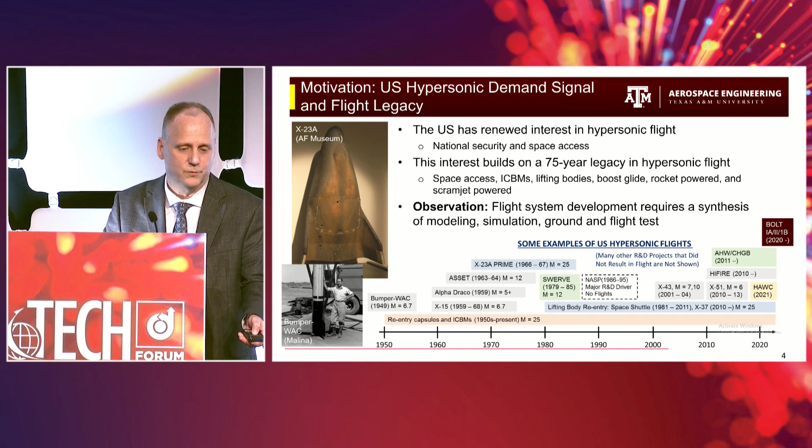And an observation, maybe it's a hypothesis, is that these flight system development efforts required a synthesis of modeling, simulation, ground, and flight tests to be successful. And I've listed the BOLT flight test program at the top right there.

Thermal management is another key challenge associated with hypersonic flight, and I chose the X-15 primarily as an example for two reasons. One, Hugh Dryden was instrumental in the X-15 program existing. And secondly, we did some experiments at A&M where we tried to reproduce in our wind tunnel the thermal loading that resulted in the loss of that scramjet engine test article just below the X-15. We were able to successfully reproduce that experiment.

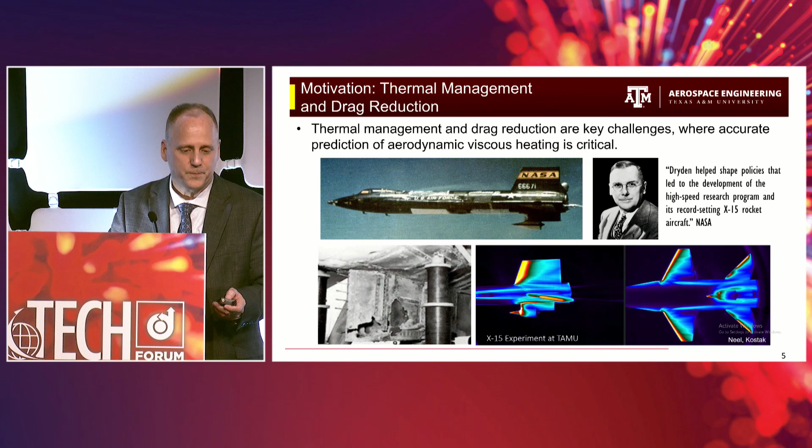Moving on, my last motivation slide is really based on Air Force interest in hypersonic viscous flow. The Air Force Research Laboratory has engaged in a number of flight tests, starting with the HIFiRE-1 geometry, which is a 7-degree cone, bottom left there, HF1. That produced a two-dimensional flow field with two-dimensional boundary layer instabilities.

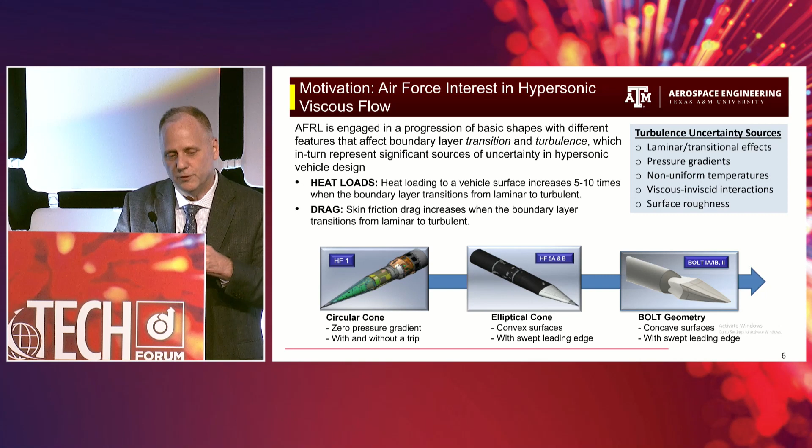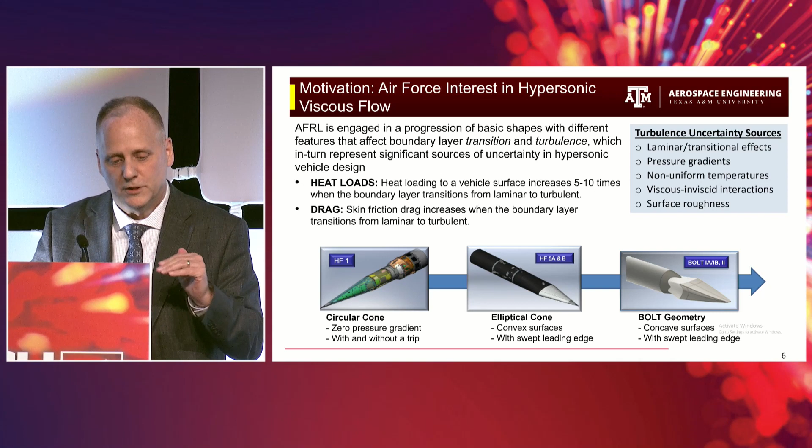Moving to the right, the second geometry was a 2-to-1 elliptic cone, which produced a convex surface with three-dimensional instabilities and three-dimensional boundary layers that led to cross-flow breakdown to turbulence. Then finally, the BOLT geometry, shown there, which is a concave surface with highly swept leading edges, which has some of the same features as the elliptic cone in terms of flow structure, but is more dynamically rich in terms of the number of secondary flow structures set up by the shock structure. We'll talk more about that as we move on.

But heating is really important for hypersonic flight. As we transition from laminar to turbulent flows, we can see anywhere from 5 to 10 times the heating level, and the skin friction follows suit via the Reynolds analogy.

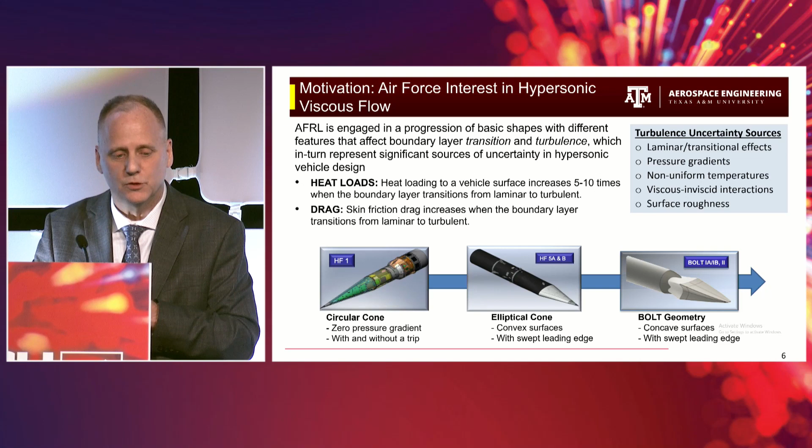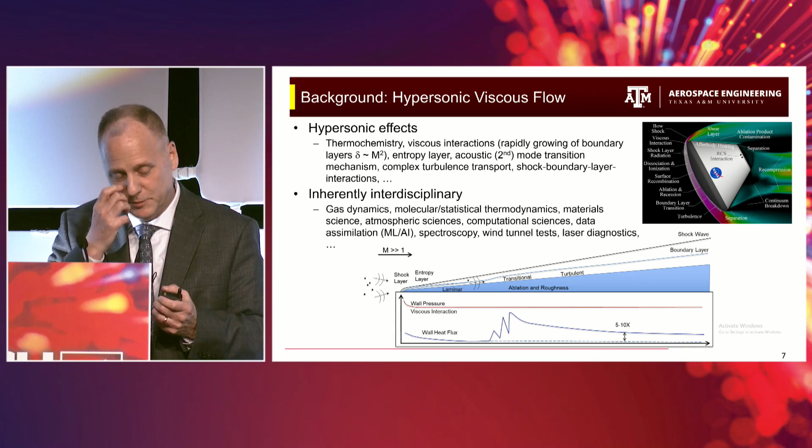Just a little bit of background on hypersonic boundary layer viscous flows. This may seem a little sophomoric, but I just wanted to take a minute and walk us through some of the processes because this will set the stage for the flight test experiment.

I'm usually wanting to use the laser pointer, but you can't see that. Starting from the leading edge of this hypothetical vehicle along the bottom, you have a shock layer, and we'll go through each of these in more detail. You have a shock layer and a highly curved shock wave, which produces an entropy layer, basically a change in entropy as the shock is turning around and following the body.

That entropy layer leads to vorticity, which can impact the growth of the boundary layers and impact the receptivity in the boundary layers. Eventually the boundary layer will reach a high enough Reynolds number and the disturbances will be such that the boundary layer will transition to turbulence, and when that happens, you get an increase in heat transfer.

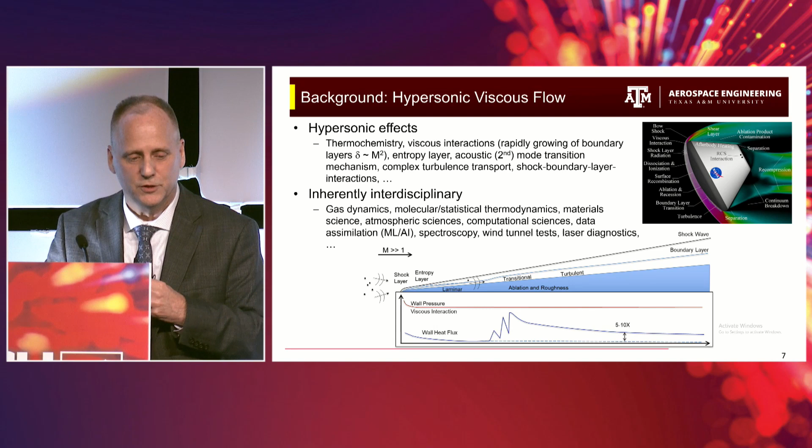Because hypersonic flows involve high temperatures, thermochemistry, radiation, gas dissociation, it's very multidisciplinary. But that's what makes this problem very exciting—it involves a lot of disciplines and you have to work these problems simultaneously, or work together, to make progress. So I'm going to walk through some of these regions really quickly.

And all of that's feeding into the boundary layer to influence transition, turbulence, erosion, ablation. All of those factors are happening in these flows.

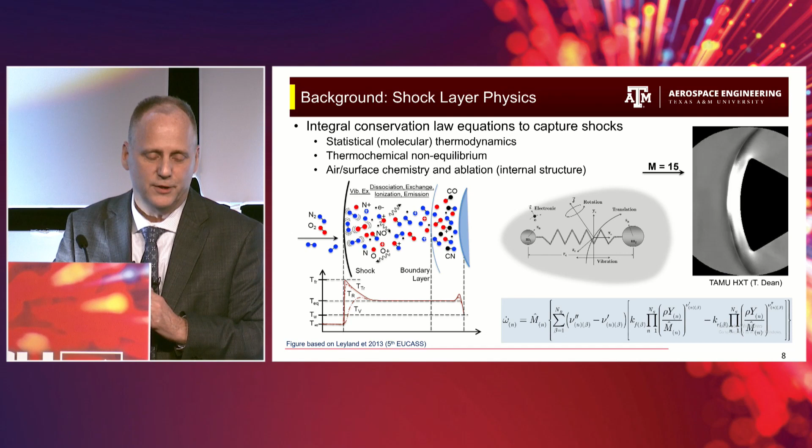So let's move to the next slide. A little further downstream, we have the laminar boundary layer growth, and these hypersonic flow fields create highly curved shock waves, and these boundary layers will experience pressure gradients due to these shock waves because the boundary layers themselves will grow very rapidly. That creates a displacement which changes the shock shape, which then ultimately changes the boundary layer. So it's a very coupled problem.

It's a solved problem, though. This is not something we have—this is a laminar problem. We can solve this problem. So we've solved this problem for the Bolt 2 geometry.

I'm going to take this slide to introduce the Bolt 2 geometry in a little bit more detail. We're looking at the flow going up the geometry, with the nose at the bottom. You can see all of these vortex streaks on that boundary—that's the laminar basic state.

So this is a very complicated laminar flow. Each of these structures provides a different potential mechanism to lead to transition from laminar to turbulent flow, as well as complex early turbulence. Trying to understand and decouple all of this is the purpose of the Bolt 2 flight experiment.

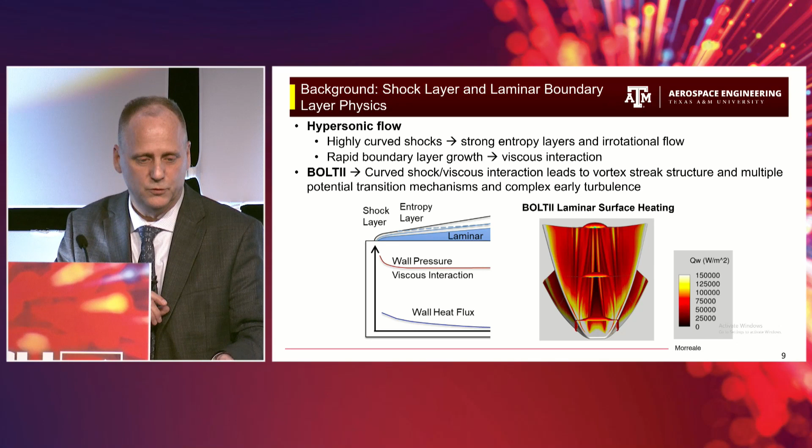The boundary layer will take some of these disturbances and amplify them. Some will be damped—it depends on the structure of the boundary layer: the velocity gradient, the temperature gradient, the pressure gradients. All of these things can have an influence on the boundary layer transition process.

But once the receptivity process happens and these disturbances make it into the boundary layer, you start to see growth of some of these—you have modal growth. That's along path A, and typically we're talking about first mode, which is Tollmien-Schlichting. Second mode would be an acoustic mode, which only occurs at high Mach number.

You have crossflow and Görtler. Crossflow is a three-dimensional boundary layer instability. Görtler is due to concave curvature. And there are other modes that maybe we haven't identified yet.

Then there are other mechanisms listed: transient growth, and bypass to the far right. The secondary mechanisms result due to the distortion of the boundary layer from the primary mode mechanisms. Prediction of transition for these types of problems really hinges on identifying the mechanisms and when they're going to transition.

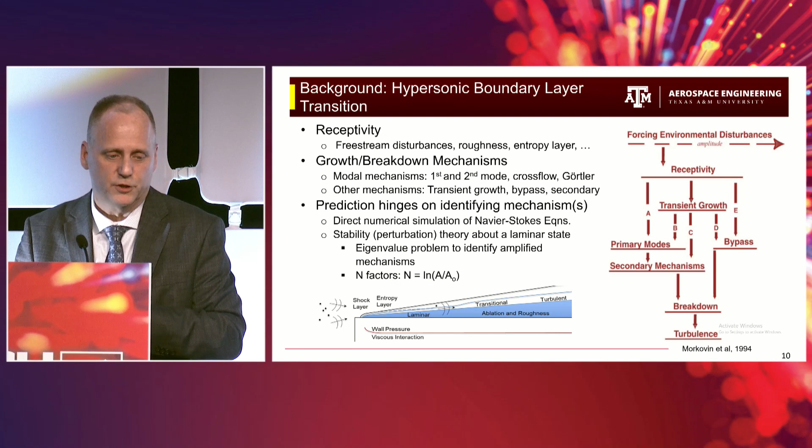So the tools we have under our belt to study this are direct numerical simulation of the Navier-Stokes equations, or we can use stability theory. Stability theory ultimately works its way into an eigenvalue problem. We look at the growth rates, and at a certain growth rate we determine transition may happen at this particular N factor.

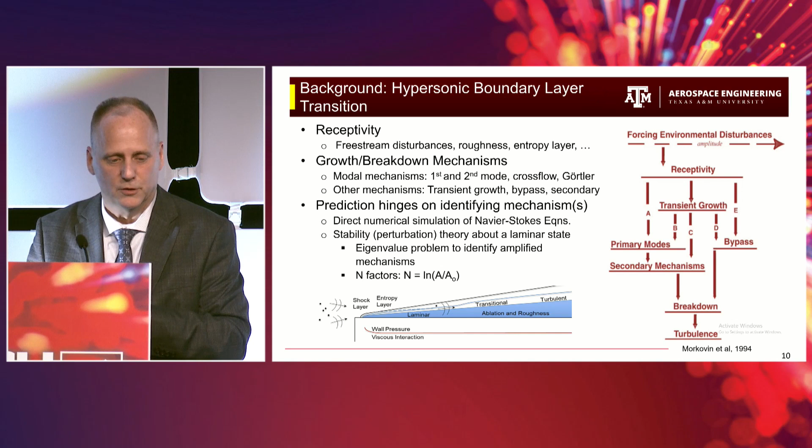The N factor is a measure of the amplitude at the location you're at, normalized by the initial amplitude. These scale exponentially, so we typically talk about these on a log scale. Let me just go to the next slide.

So this is what second mode looks like—these are some measurements from Farhan Siddiqui and Bill Saric and myself in the Mach 6 quiet tunnel at Texas A&M. You can see that rope-like structure in the boundary layer.

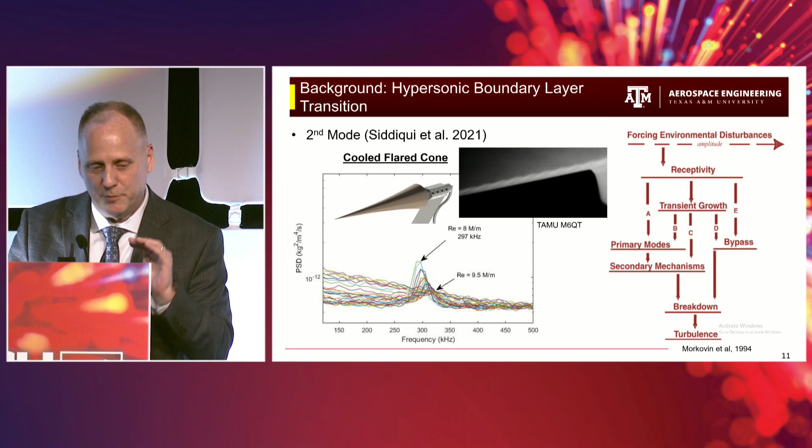That's the second mode instability, and you can see its growth rate. You can see the peak around 300 kilohertz, and then you can see it break down to turbulence around 9.5 million per meter in terms of Reynolds number. Keep that picture in your mind because it's going to be important when we talk about the Bolt 2 flight test. The other mechanism that's important for the Bolt 2 flight test is crossflow.

These are some measurements from Ian Neel, also in the Texas A&M Mach 6 quiet tunnel. You can see a couple of things here: on the figure on the left, which shows the color contour of the streak structure, upstream of those red regions are vortices, called stationary crossflow instability vortices.

These result from the fact that you have flow wrapping up around the 2-to-1 elliptic cone and forming a sort of mushroom region in the center. This gives you a span-wise velocity gradient that results in these instabilities, which lead to transition. That jagged front you see there is characteristic of crossflow instability.

Below that is a numerical simulation from Helen Reed's group by Alex Moyes, showing one of those crossflow vortices. You can see that distorted boundary layer.

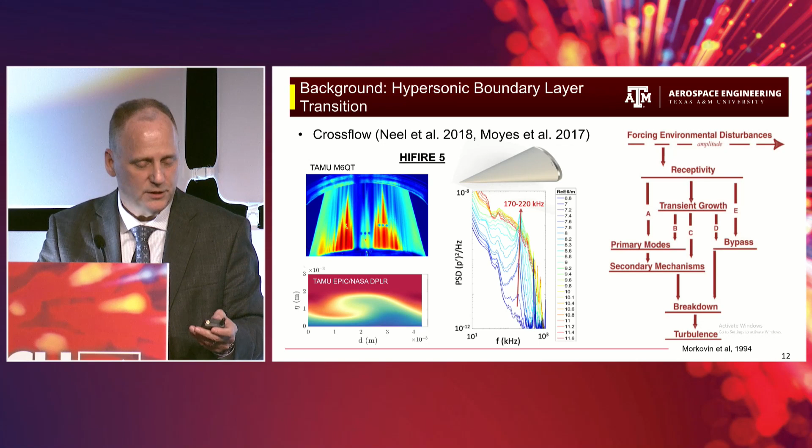That results in a number of additional instabilities, and these instabilities are the secondary mechanisms that can also lead to boundary layer transition. The power spectra shown in the middle, Ian measured with one of the PCB transducers. He was able to pick up that secondary instability which led to breakdown to turbulence in those red streaks on this geometry, another building block towards the Bolt 2 geometry.

On the Bolt 2 geometry, we have this complex laminar basic state with all of these vortex flow structures. The question then becomes, which of these structures leads to transition, and how long does that transition persist into the turbulent flow field? There's been a lot of work in preparation for this flight test.

I'm showing some simulations. The laminar basic state was run by Brian Morreale at Texas A&M, and there's also some numerical simulations run for the Bolt 1 geometry, which is the same geometry as Bolt 2, out of the University of Minnesota. You can see second mode identified in these DNS simulations. You can also see a vortical mode, mixed modes, and traveling cross flow, so all of these modes we talked about earlier are present on this geometry.

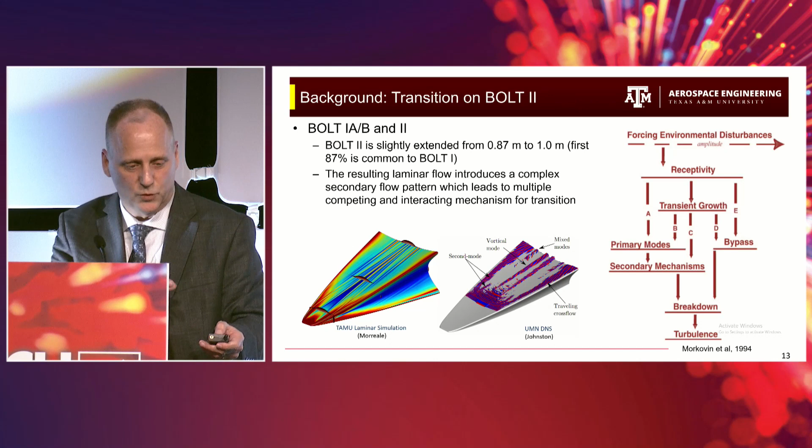So when you see second mode, you can think about that rope structure I showed you. When you see stationary cross flow, you can think about the 2-to-1 elliptic cone. The question is, which of these things leads to transition? So that's the transition part.

Now we're going to move to the turbulent part of the flow field. Turbulence has a number of different characteristics, but the one I'm going to focus on here is that it's characterized by a wide range of scales, and this range depends on Reynolds number. The higher the Reynolds number, the larger the range of scales, both temporally and spatially, so that makes numerical simulation a challenge.

However, direct numerical simulation techniques do exist, and they are informing the community on the dynamics of turbulent flows. But they are limited to relatively modest Reynolds numbers, and when you bring in hypersonic effects such as chemistry and thermal non-equilibrium, you introduce additional equations into the equation set at extensive computational cost, so it becomes even more challenging to do direct numerical simulations.

Large eddy simulations exist. They provide an opportunity to simulate the largest scales and model the smaller scales, so you can bring a little bit of the physics into the problem. Those are computationally feasible for some shapes, while modeled LES—there's a table at the bottom there from Choi and Moin, which lists the Reynolds numbers. Practical Reynolds numbers are 10 to the 7, 10 to the 8.

For DNS, we're talking 10 to the 15, 10 to the 18 mesh grid points in your mesh. Wall resolved LES, 10 to 9, 10 to 11, that's doable. Wall modeled LES, 10 to the 8, 10 to 9, that's definitely doable. The DNS ones are a bit more of a challenge for us, but we're making progress. Then Reynolds averaged Navier-Stokes is where we average out all of the fluctuations. These are the least accurate, but at least relevant for the hypersonic design cycle.

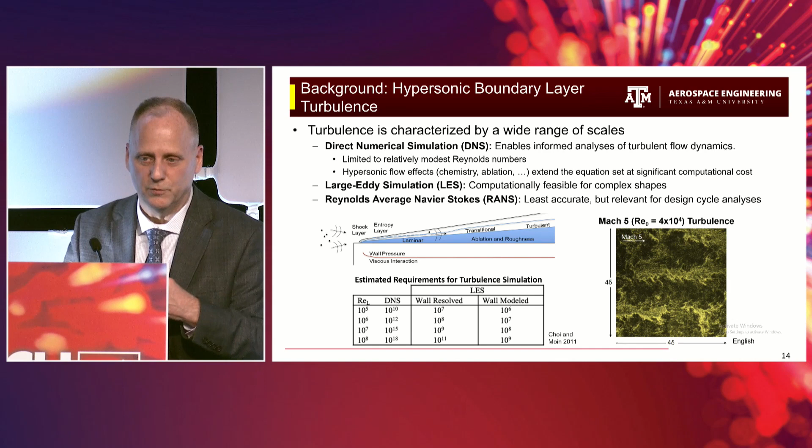I have a figure here, which is a PIV image from our laboratory from Ben English. Some of you that work with Sandia may know Ben English. This is a top-down view of a hypersonic turbulent boundary layer, very high Reynolds number Mach 5 boundary layer, and you can see the scale and structure we're talking about in these flow fields. This is a beautiful image, and it's a challenge to resolve all of these physics.

In terms of analysis for these flows, this is a little bit different than what we would do for the transitional problem, where we're trying to find the mechanism and identify where that breaks down. Here we're going to modify the conservation law equations. We're going to solve them directly for all of the turbulence, or we're going to modify them by doing a decomposition, a Favre or Reynolds average decomposition.

You can think of that instantaneous velocity at the top there, U sub i, as equal to either the resolved plus the unresolved part, or the mean plus the fluctuating part. You substitute all of that back into the conservation law equations, and what happens is you introduce the closure problem for turbulence, shown here. These moments in the boxed expressions are new unknowns that we have to either resolve or model, and that becomes the challenge. This problem has been around for about 120 years, so it's not a new problem, and there's some job security in working in turbulence, I think.

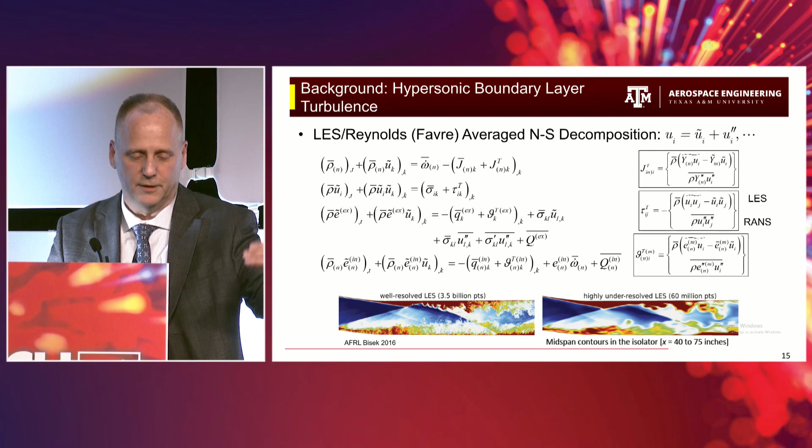There's some great images by Nick Bisek from AFRL, where he studied the effect of poorly resolving turbulent flows. He has a well-resolved LES simulation with about 3.5 billion points, and then he systematically reduces the number of grid points. Around 60 million points, he stopped, because you start to see significant differences and errors that can be traced to the subgrid modeling. So there's a lot of work to be done in turbulent flows.

In terms of industry standard, I've been to a number of talks today, and almost everyone runs the Spalart-Allmaras model, the K-omega model, or Menter's SST models. All of these models have one thing in common: they're basically computing an eddy viscosity, mu-T, in the expression for the turbulent Reynolds shear stress. They have advantages - a strong low-speed basis, and they're relatively simple to implement into a CFD code, since you just have a subroutine that computes the eddy viscosity, add that to the viscosity, and now you have a turbulent flow solver.

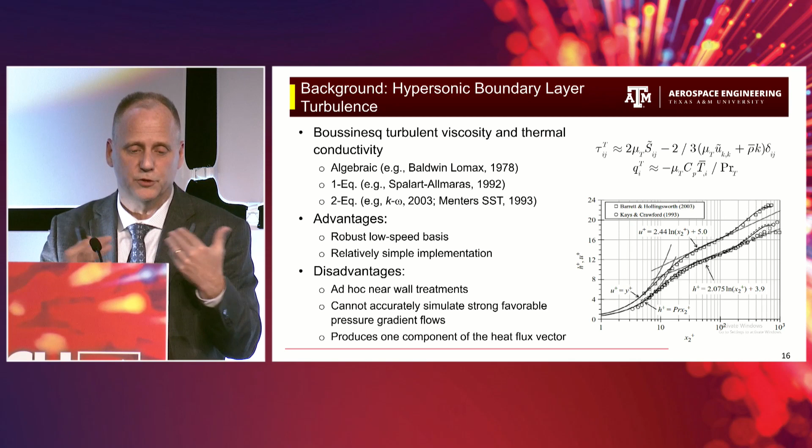There are some challenges though for high-speed flows, and I'll talk about a couple of them. Number one, the near-wall treatment, even at low-speed flows, is ad hoc and empirical. That's a challenge, resulting in inaccuracies, especially at high speeds, high Reynolds numbers, with cold walls. And they can't capture strong favorable pressure gradients, where we've observed that the Reynolds shear stress changes sign. That's a challenge.

So people have done different things - RANS beyond Boussinesq, going to second-order transport equations. I won't put a quiz at the end on the equations, but I will talk about them. These are derived by taking moments of the Navier-Stokes equation, allowing us to derive an evolution equation for the Reynolds shear stress, the energy flux, and all the different things we need to model hypersonic flows. The problem is it introduces new unknowns, so we have to draw models somewhere.

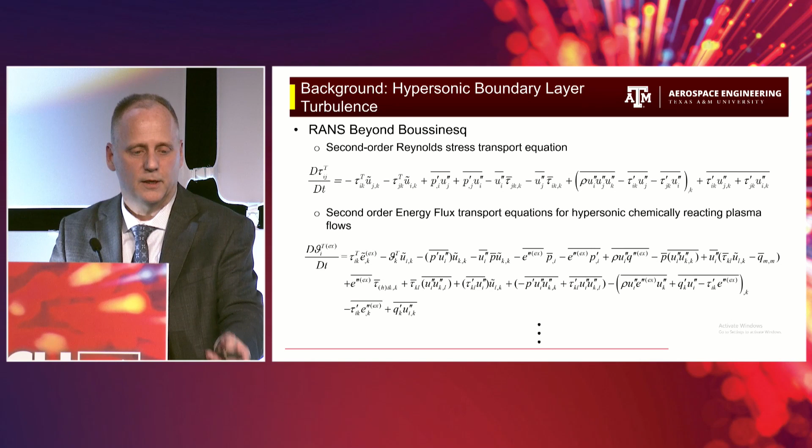So the question is, is it worth our while to do this? I have one set of data here, and the answer is, of course, yes - or I wouldn't be talking about it. Of course we want to do this. This is just an example why.

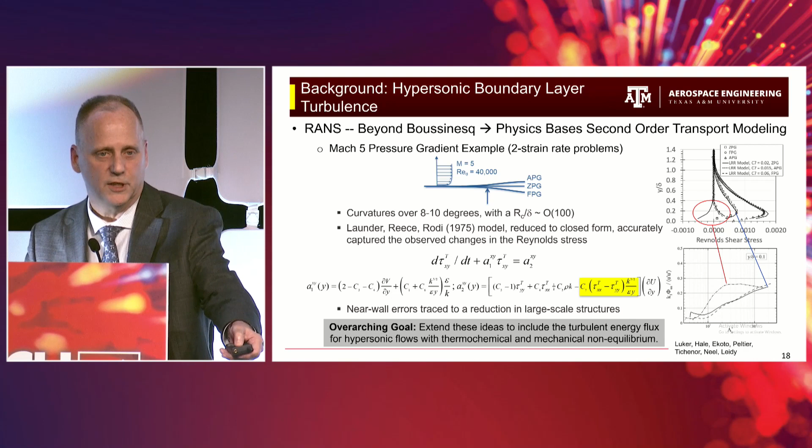That doesn't make it a model, that's still a curve fit, but the point of this whole slide is to demonstrate that moving beyond Boussinesq will pay dividends. And so that's the importance of this slide. And this leads, and the goal for us is to extend these ideas to all of the moments that we need for hypersonic flows. So that leads to our laboratory.

So we've developed a laboratory specifically to study these kinds of flow fields. And I'll just talk briefly about this.

This laboratory houses 3 relatively large scale, I think important hypersonic wind tunnels: the Mach 6 quiet tunnel, which came to us from NASA Langley. And that came to us because we hired Bill Saric and Helen Reed in 2005, so that was a gift from NASA Langley because we brought 2 of the leading experts in boundary layer transition to Texas A&M.

The actively controlled expansion tunnel is a conventional tunnel that we designed and built in-house at Texas A&M. That's a workhorse facility. Those 2 facilities share infrastructure, and since they've been operational, since around 2010, we've run them about 5,600 times. And what we do is we increment the stream tube length for each run, and if you add them up over that 5,600 times, we've gone around the world 3.5 times at Mach 6 in these tunnels. So that's pretty impressive. We've generated a lot of data out of these facilities.

The newest facility is the hypervelocity expansion tunnel, which is our high enthalpy facility. You've already seen a result from that - that was the Orion capsule. And this facility is a large-scale facility, has a 3-foot exit diameter, and we can do flight matched up to about Mach 15 or 5 kilometers per second. We can go faster than that, but that's flight matched with clean aerothermal chemistry. We can go higher than that, but we'll lose some of the aerothermal chemistry. We'll start to create issues in the flow field. Or we can go the other way, and we can run this at low temperatures and get exceedingly high Reynolds numbers. We can get over 100 million per meter Reynolds number in this same facility.

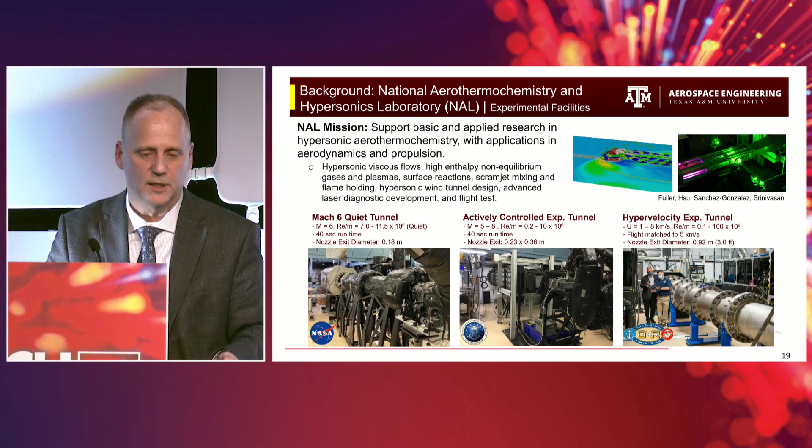So those are the 3 major facilities within what we call the NAL. Our diagnostics - the NAL sits right next to what we call the Aerospace Laboratory for Lasers, Electromagnetics, and Optics, which is run by Dick Miles. It shares a wall, and all of the facilities now are surrounded by lasers from Dick's group. And I would say 1 in 5 experiments that we do, we're validating a laser diagnostic technique for the ALLEMO. And so we're really excited about that.

In terms of computations, we're moving into doing direct numerical simulations in our laboratory. That's a heavier lift than we thought, but we're working our way through it. And we do a lot of reduced order modeling, as you've seen on the previous slides.

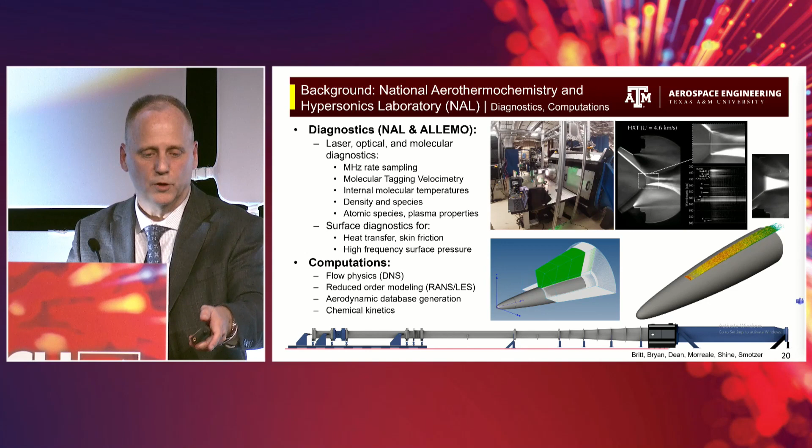This is spatially and temporally resolved optical emission spectroscopy. This was set up by Chris Limbach over a weekend. And so that's just a fantastic experiment that Tyler Dean is working on. And then, of course, Brian Morreale has been doing the DNS calculations for what we call the ONR ogive. This is the blunt ONR ogive. And we're running these experiments also in HXT at very, very high Reynolds number.

You're looking at me like I need to go faster. I'm doing okay on time.

Fine. All right, so that brings us now to the Bolt 2 flight test, which is the boundary layer transition flight test in memory of Mike Holden. Mike was a co-PI on the project with Aaron Dufrene. So this project was out of A&M and with CUBRC.

I was a PI, Helen Reed and Ed White were co-PIs from Texas A&M. Aaron Dufrene, Tim Wadhams, and Mike Holden were the PIs from CUBRC.

We lost Mike in the first year of this program. That's a photograph of Mike with Bolt 1. And this plaque, written by his colleagues and family, was mounted to the Bolt 2 geometry for the flight. On there, they quote, higher and faster twice. I just want you to keep that in mind as we move forward. A lot of the force behind how we operated and set up the Bolt 2 flight test program was driven by Mike as we were writing the proposal.

And so the Bolt 2 flight test team, there's a lot of people on this slide. Every one of them contributed to the success of the Bolt 2 flight test. I'll start with the top box going from right to left, starting with Yvette Leyva.

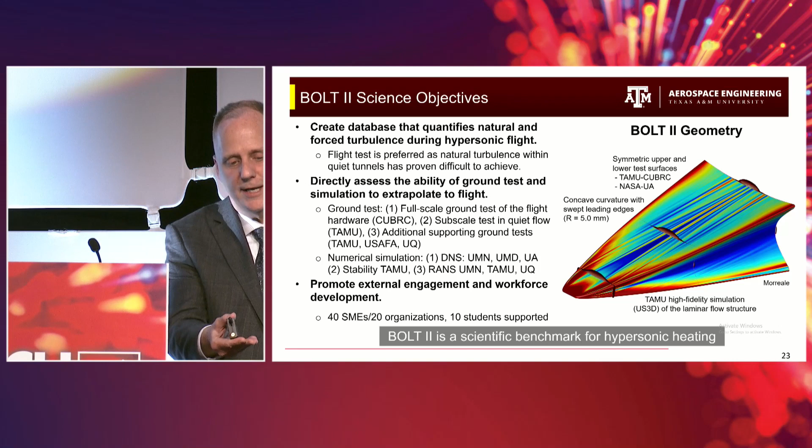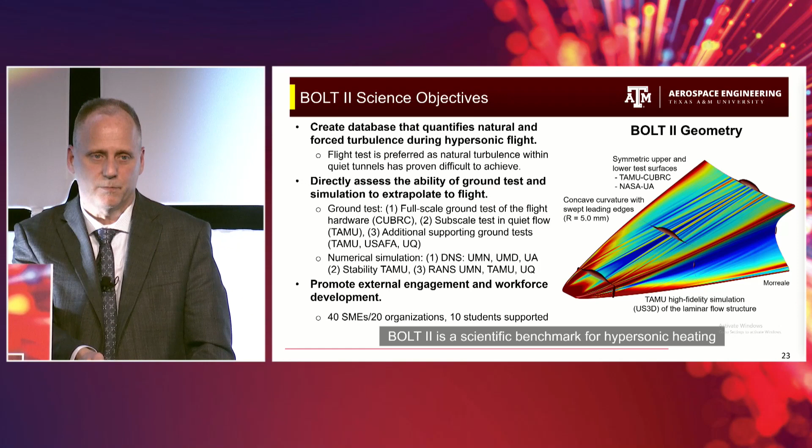Side A was the side that we focused on, which had natural transition. NASA Langley's Scott Berry focused on side B, where he put some trips on the side to look at forced transition on this geometry. So there were 2 experiments that took place during this flight test. So what were our questions?

So the question that we ask is, what is the mechanism that leads to turbulence in flight? How long, once we determine that, do these processes persist into the turbulence? And what is the role of non-uniform temperatures and pressures?

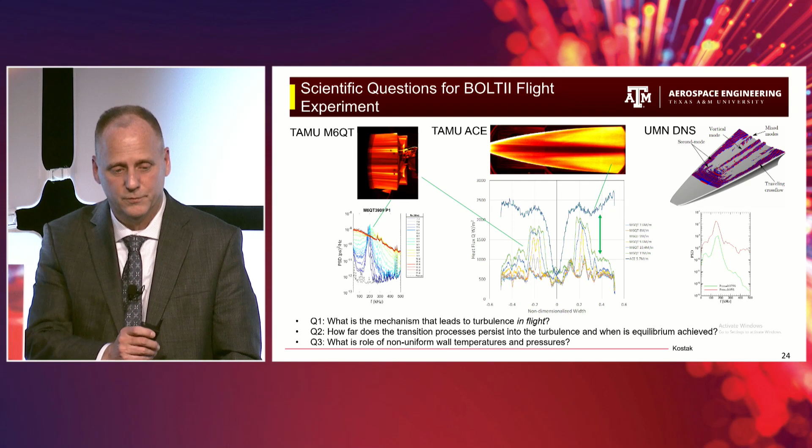I want to point out that we also did these PSD measurements, very much like we did for the 2-to-1 elliptic cone. You can see this secondary instability on the PSD just below that figure, lighting up around 200 kilohertz. The right image is the DNS out of Graham Candler's group, and you can see again that secondary instability lighting up around 200 kilohertz. So there was great agreement between the experiment and the direct numerical simulation.

Okay, so this is the project execution, and I wanted to start this with this quote from Hugh Dryden, bringing him back into the picture again: the purpose of flight research is to separate the real from the imagined and to make known the overlooked and unexpected. I can tell you there was a lot of things that were unexpected when we set out to do this flight experiment.

One of them was the number of reviews we had to go through. At the top line are all the Air Force reviews: the conceptual design review, the preliminary design review, the critical design review, the technology review board. Then we had the NASA reviews at the bottom, the mission initiation review, the readiness review, the design review, the mission readiness review. We were reviewed all the time.

In fact, I counted it up. I went into Google Calendar and counted how many meetings we had associated with the Bolt 2 flight test. It was over 250 meetings associated with this flight test. This was an enormous task that we worked through.

So step 1 was to design the flight experiment, we did all of that. Step 2 was to build the hardware, that was the CUBRC role on this, and of course Aaron Dufrene was instrumental in designing the flight experiment as well. Then we performed the flight experiment, which took place on March 21st, 2022. We're currently analyzing the data.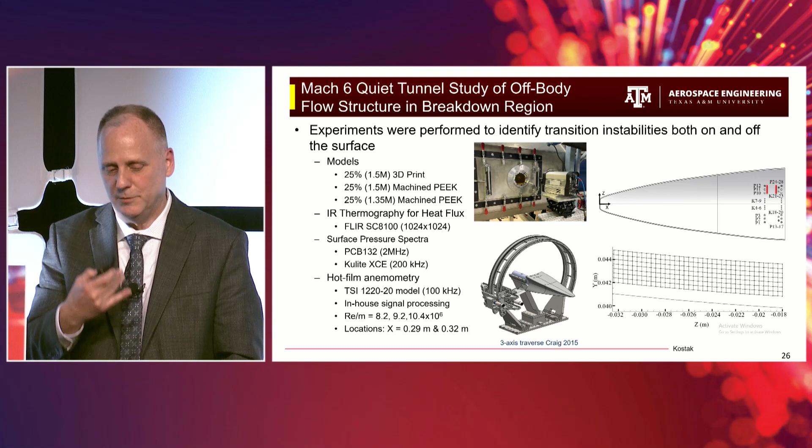But before we talk about the flight data, I want to talk about one of the ground test experiments that Heather Kostak did in support of this. We had a subscale model, 25% subscale models, that we put into the Mach 6 quiet tunnel. We did IR thermography, PCBs, Kulites, hot wire anemometry. I'll just cut to the chase on this because I will run out of time.

So what she was able to do was quantify the breakdown mechanism, at least under quiet flow in our wind tunnel. What she identified is that mixed mode structure that we saw earlier in the DNS calculations from Graham's group, and you can see it again here. You can see those bright stripes on the experimental images in black and white aligning with that similar region on the DNS calculation. That's the mixed mode region.

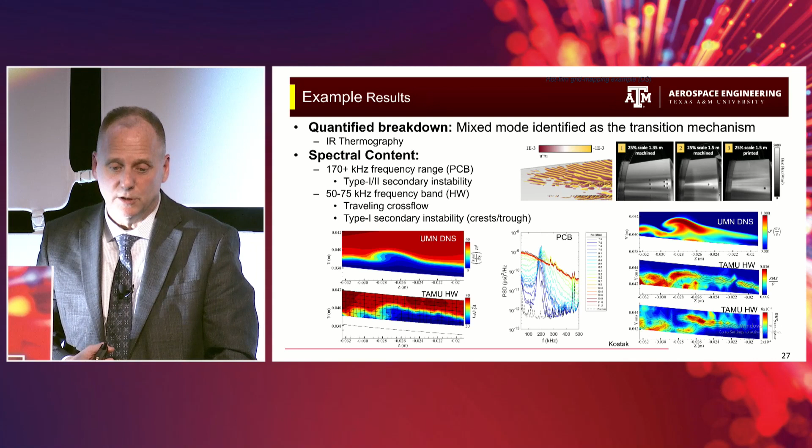So she went in with hot wire anemometry and measured that breakdown and did off-body measurements. You can see the mean flow measurements on the left, the DNS at the top, the measurements at the bottom. You can see great qualitative agreement. The hot wires weren't calibrated. And if you look at the fluctuations, you can also see really good agreement between the DNS fluctuations.

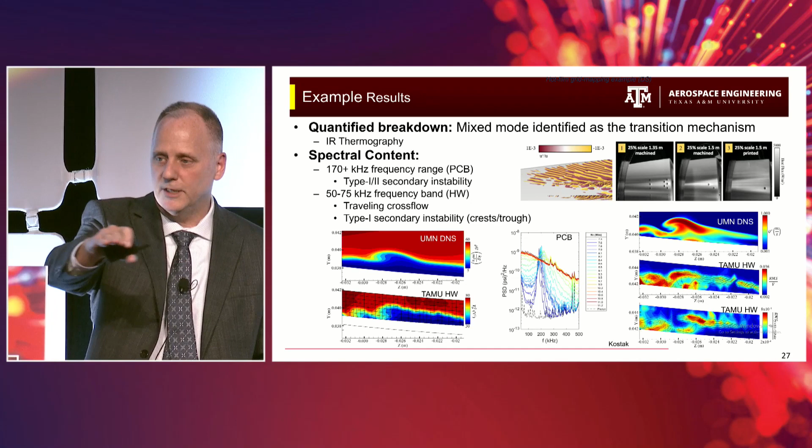And those bright red spots there are our secondary instability modes growing and wanting to break down. So on that Morkovin figure where we had the secondary instabilities, that's what you're seeing in those bright red spots on both the DNS and in the experiment.

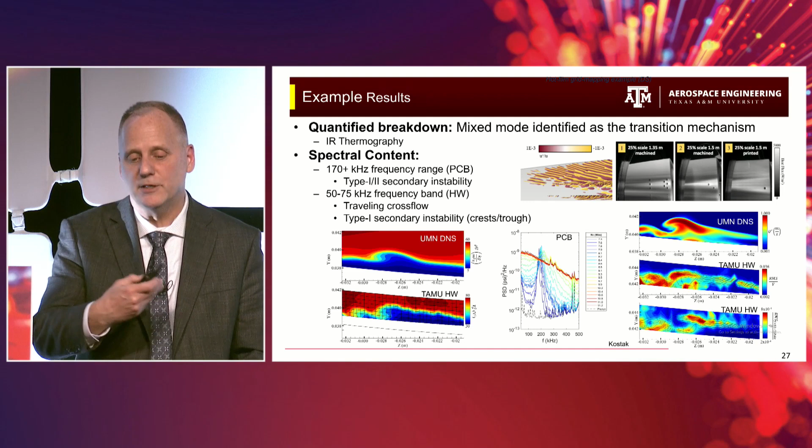And the bottom image, she started to look at a specific frequency band to pull out, looking for a specific mode. So that's really interesting results, and that will help interpret what we see in the flight test data.

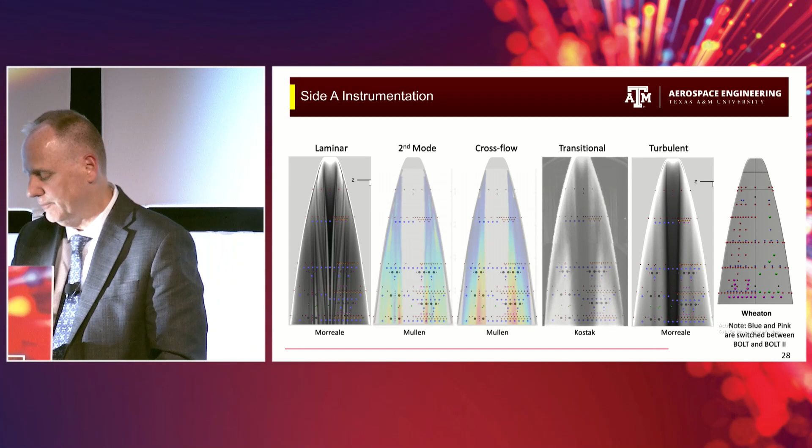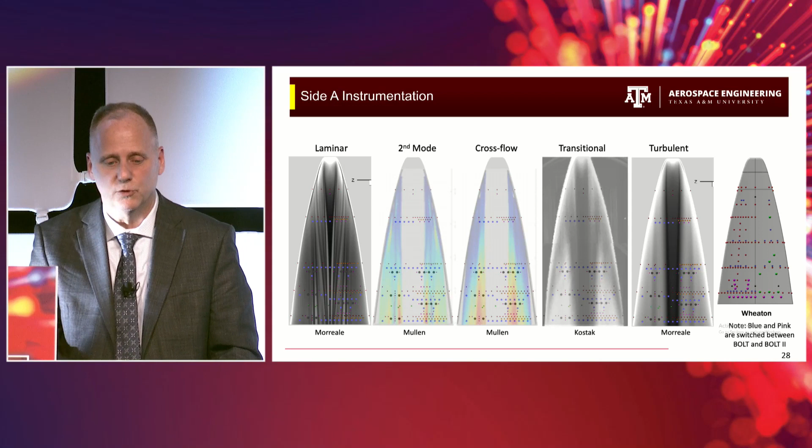With that example, we did a lot of things to design the flight experiment. You can see on this figure a laminar solution, a second mode stability calculation and cross-flow stability calculation out of Helen Reed's group, ACE tunnel experiments out of our group, and then the turbulent calculations. On the far right, you can see the instrumentation layout out of Brad Wheaton for the Bolt 1 flight test.

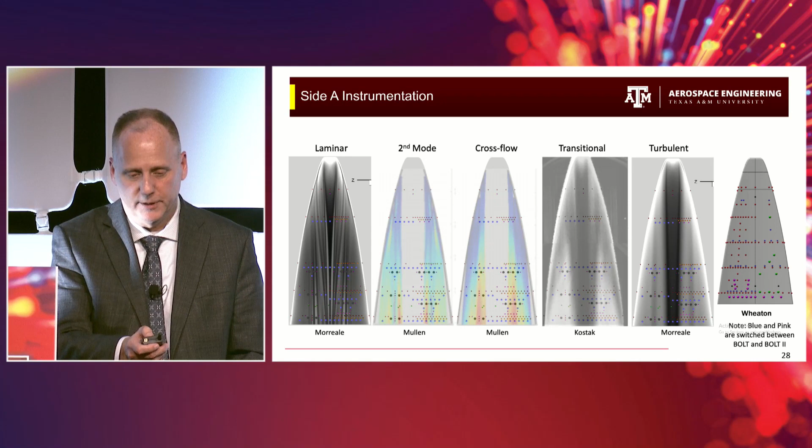Okay, so let me talk about this instrumentation layout and why we did what we did. What we did was we leveraged all of these ground test results to design the flight experiment, and so we laid out the instrumentation.

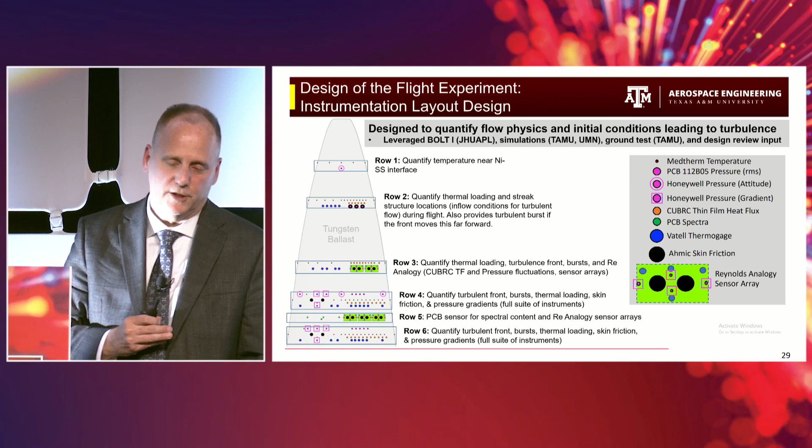But the other factor that came into this, and the reason this looks the way it does, was because of the preliminary design review. Roger Kimmel, Brad Wheaton, and John Lafferty all asked the exact same question: how are you going to tell the difference if this thing is coning, in between those streaks sweeping back and forth, and turbulence on this? So that fundamentally changed how we had to think about the instrumentation layout.

So let me walk our way through the rows here, and we'll talk about what I mean by that. The first row at the top has a nickel nose and a stainless steel frustum — I'll talk about that on the next slide. That first row of thermocouples are the MedTherm thermocouples you see at the top on the box on the right.

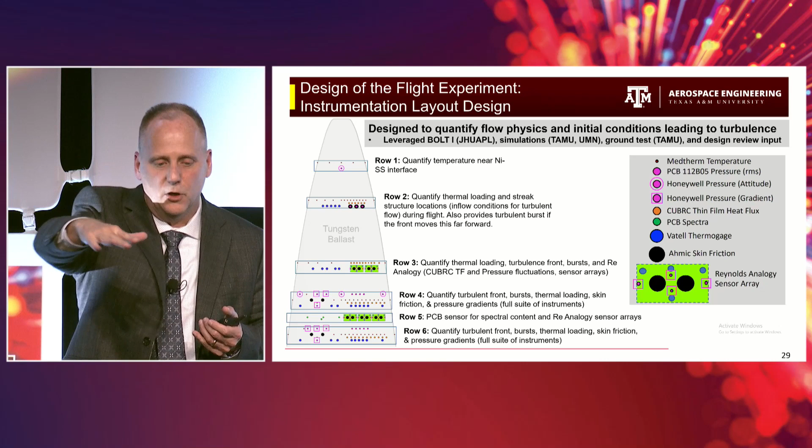That first row was there to measure the temperature along that interface so that we can quantify any steps that may happen because of differential thermal coefficients of expansion. There's also a pressure transducer, circled by the pink circle, to understand the attitude of this model — is it pitching or yawing? So we have pressure transducers to help us understand that.

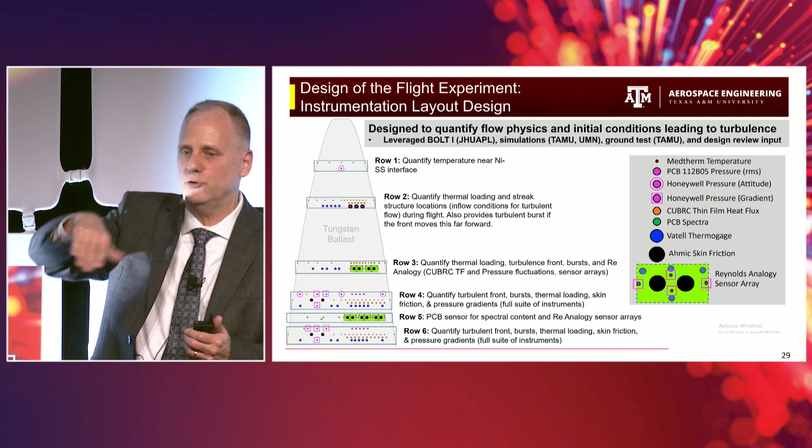We have similar pressure transducers on the back side. The second row up there near the leading edge was specifically to quantify the streak location, so we have a high density of instruments across there to quantify the streak location as they may be sweeping back and forth. That's sort of the inflow condition to the turbulence at the bottom.

Rows 3 through 5 were set up to quantify that transition front and the turbulence as this thing is descending into the atmosphere and the Reynolds number is going up. That transition front is going to move forward — all those mechanisms we talk about are going to move forward, and eventually this is going to go fully turbulent. So all of these transducers and instruments on the bottom were designed to quantify all of those.

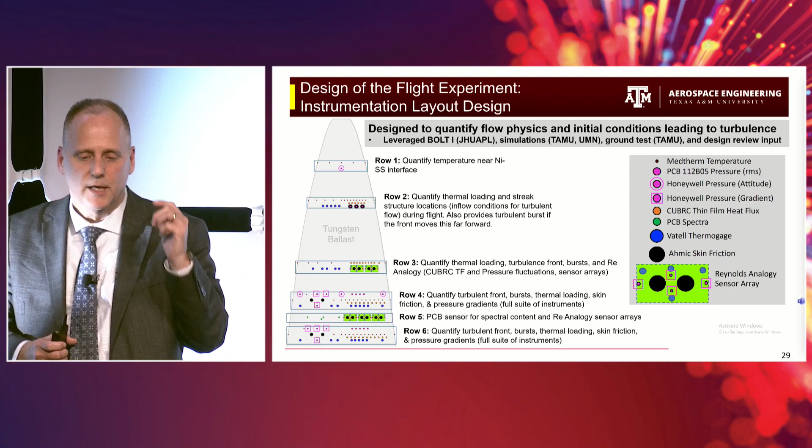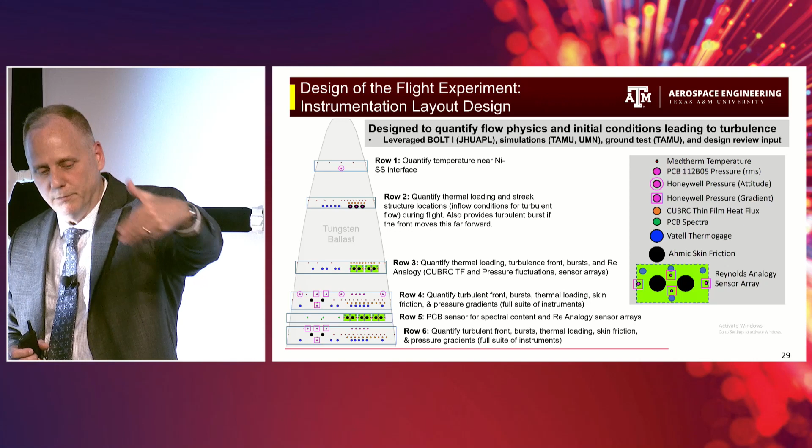So I'll run down the list. We've got the pressure transducers, and we also have CUBRC thin film sensors to measure the turbulent bursting. On the left, you can see 4 PCB sensors that were put on there to measure the turbulent spectra, and these are high frequencies — sampled at 2 megahertz.

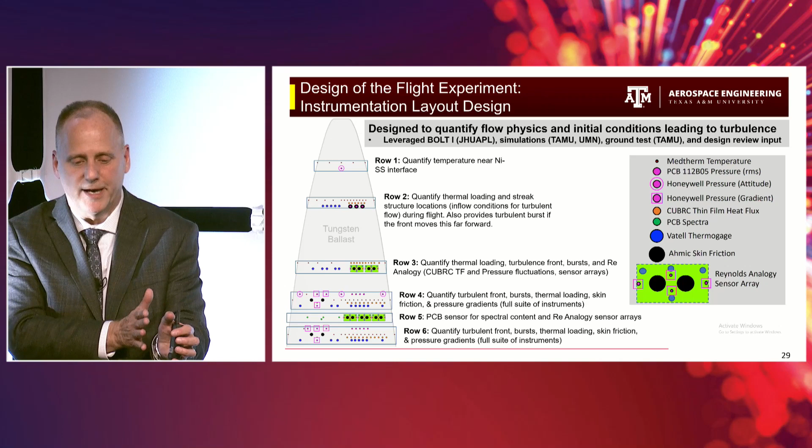Because we can't telemetry back 2 megahertz of data, what we ended up doing — this was Dave Adamczak — is we onboard did FFTs, and then telemetried down the top 20 FFT peaks every 9.2 milliseconds. You'll see some of that data in just a few minutes.

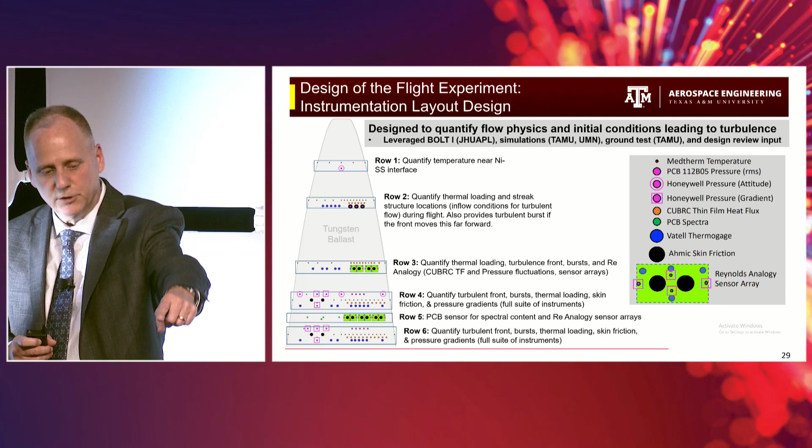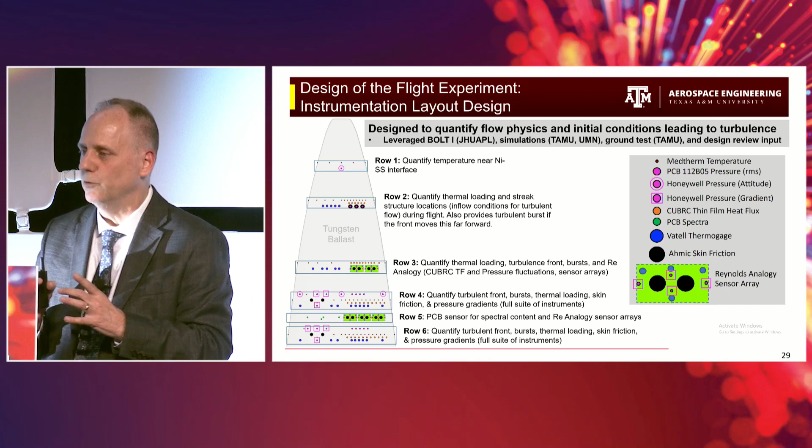The Vatell thermogauges are there to directly measure the heat flux, and then we have the Ahmic skin friction gauges from Ryan Merritt — you can see all of those. Some of these instruments we clustered in a way to allow us to infer Reynolds analogy along with the surrounding pressure field on this, as well as the temperature field.

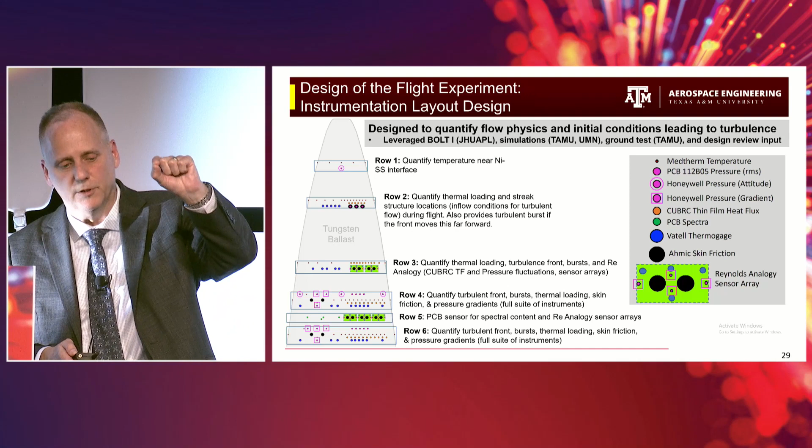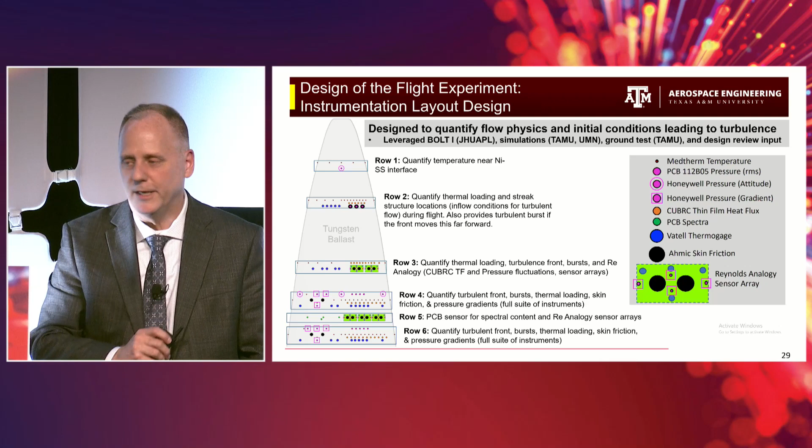I should point out that the MedTherm thermocouple temperature was measuring the temperature on the outside surface and the inside surface of the frustum, so we used that to compute heat transfer as well. There's about 300 sensors, about 400 channels of data coming out of this flight.

In terms of flight stability, I don't want to go into the details here, but it took us about 9 months to come up with a stable flight for this geometry. And this is it.

One of the challenges with this geometry is it's an asymmetric leading edge, so the nose geometry itself is a lifting body when you get a bit of an angle of attack. Producing a flight stable system was a challenge.

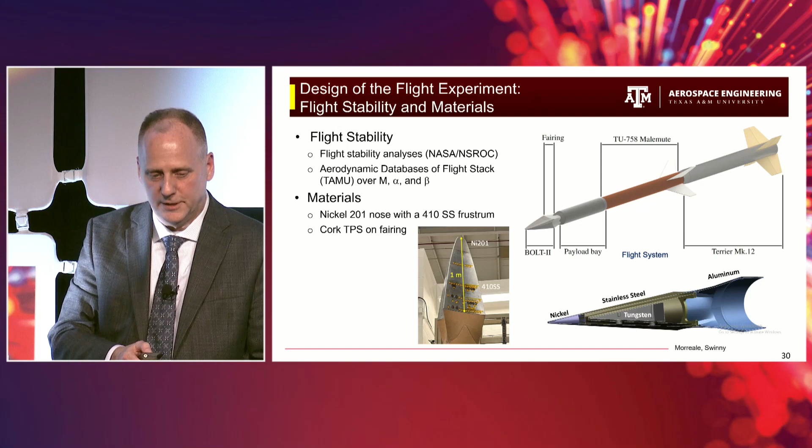We flew on the Terrier Improved Malamute. The materials chosen for this were based on flight stability and the fact that our Mach numbers weren't going to be so high. So we chose a nickel nose with a 410 stainless steel frustum, and that was actually Aaron Dufresne. The other big advantage of choosing these materials is it's like a flying wind tunnel model, so we get great signal to noise out of our thermocouples. This was a great decision.

You can see the instruments on this, and that cork board is thermal protection for the aluminum fairing to keep it intact.

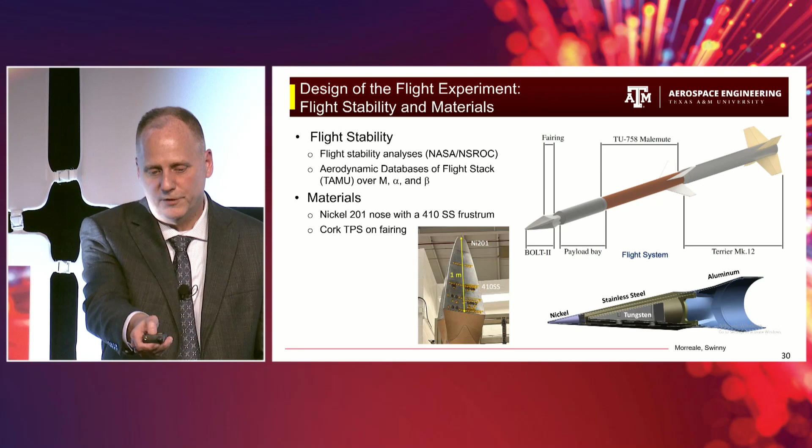Before we flew, I'm running out of time, so I'm speaking a little faster. I apologize for that. I see John over to my right. So, before we flew, and I've only got a few more slides.

Before we flew, though, we tested this in the CUBRC LENS II facility at Mach 5.3. We chose 5.3 because our initial calculations suggested our peak Mach numbers were going to be around 5.5. So Aaron and company chose Mach 5.3 to do the experiments, at 3 different Reynolds numbers. That's just an example set of data, and a lot of that data will be released tomorrow. That's Heather Kostak and Tyler Dean out there for those experiments, working with Aaron and his team.

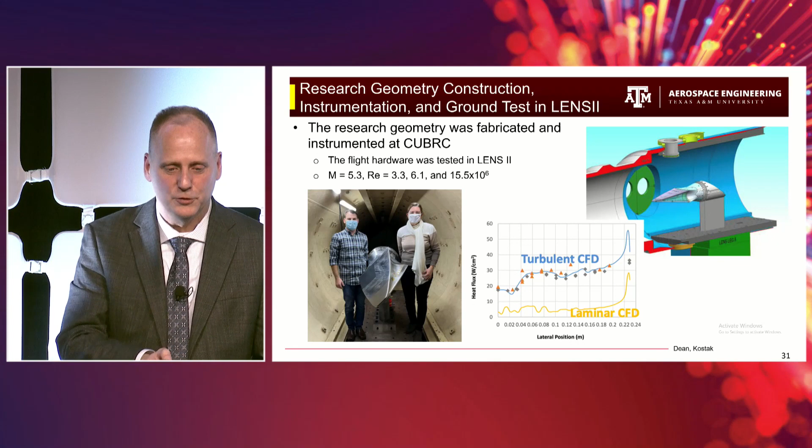That's it. So let me just play the video. Just a heads up, this video was taken by Brian Morreale with his cell phone. It's a great video though—it's the best one we have.

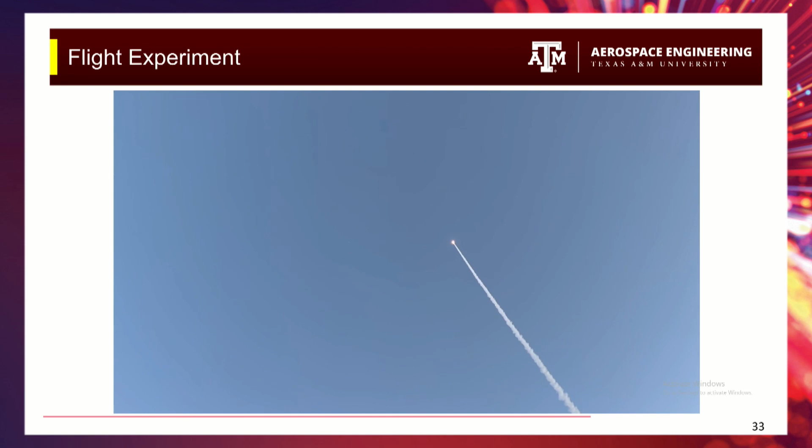And you'll see people looking up. Everybody's looking up. And there goes the second stage.

So let me show you what that did. This is the measured flight trajectory. The dashed lines are the descent, and the solid lines are the ascent. So we flew to about 200 kilometers, and you can see we hit above Mach 6 on the way up, and we were very constant at Mach 6 on the way down. We hit Reynolds numbers up to 45 million before the fins—actually the thermal protection failed on the fins on the way back in. The second stage stayed attached the entire time.

You can see that our angle of attack and yaw angles were very small, so this thing came in really true. Dave Kilcoyne, who did all the stability calculations, came up to me and said, 'Rodney, I'm really sorry.' I said, 'For what?' He goes, 'We went too high and we went too fast.' And I'm like, that's okay. Tim Wadhams was there, and he looks at Dave and looks at me and goes, 'I think that was Mike—higher and faster.'

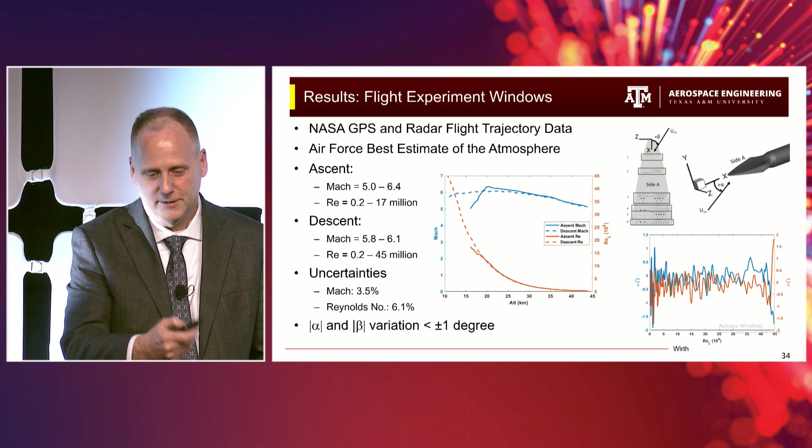So it was a great experience. But the data—let's just look at some data to give you an idea how good this is.

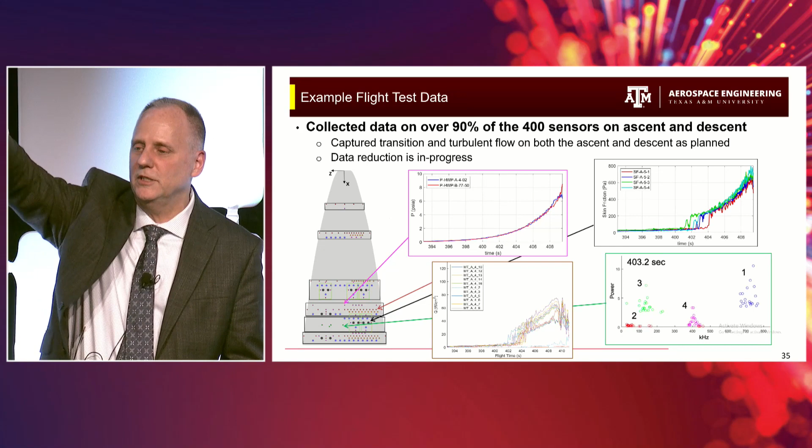So just to make sure everyone understands what transition is: before 402 seconds on the skin friction trace, you see that low value of skin friction. That's laminar flow. You can see some oscillations, and you can see the turbulent flow kick in, and it's increasing because we're diving into the atmosphere.

The PCB sensors on the left, those green PCB sensors, show modal growth. I've chosen 403.2 seconds, which is in the middle of that transition process. If you look at sensor 1, out on the far left, you can see about 800 kilohertz in terms of that modal frequency. That's probably a second mode, we learned today - a second mode modal instability, probably showing up out there on the wing.

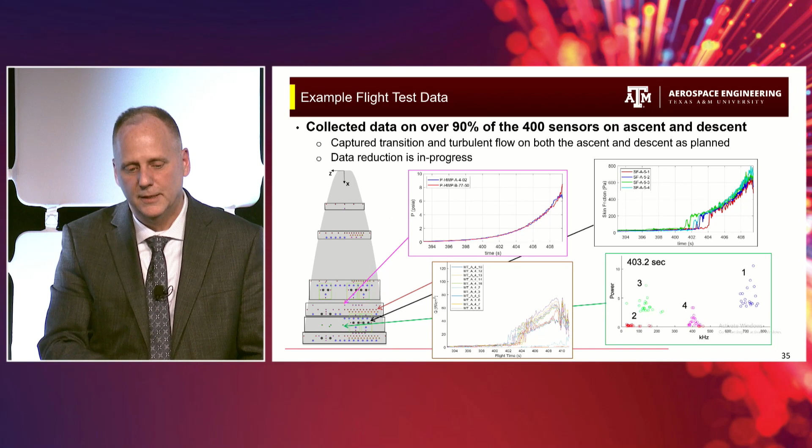That 400 kilohertz in sensor 4, which is one of the two close dots in the middle - it's the second one in that middle area, slightly downstream - that shows about 400 kilohertz. That's secondary instability showing up in that mixed mode region. And then sensor 3 is closer to the center line - that's a second mode-like instability in that center line region. Remember those figures I showed earlier, which showed the rope-like structures and then the cross-flow type structures? Well, you're seeing that in this data.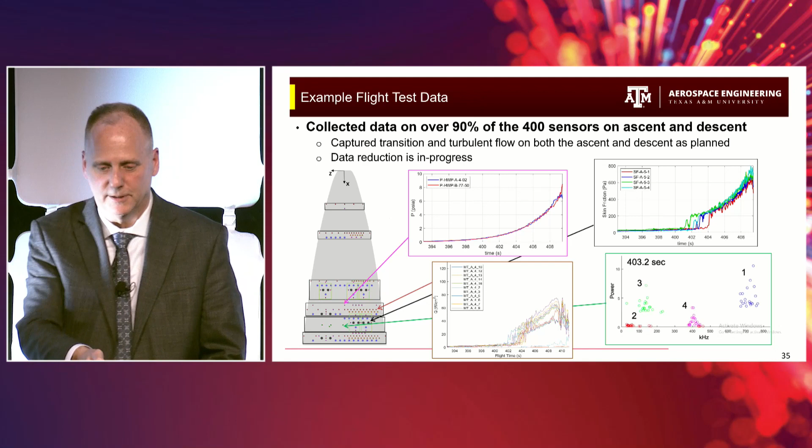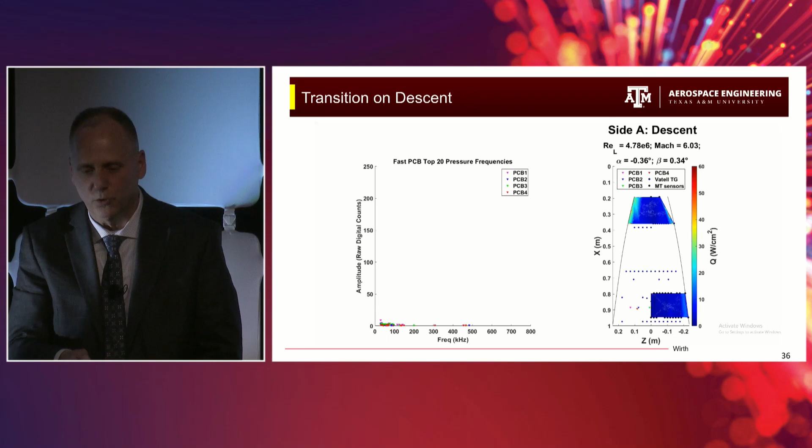Okay, this is real time. This video is real time. So you're going to watch the PCB transducers on the left, and you're also going to watch the heating on the right. This is John Wirth's work - he's a PhD student working on this. This is a full 3D conjugate heat transfer analysis where he took the MedTherm data as the boundary conditions and solved the heat transfer problem for the steel frustum to produce this video.

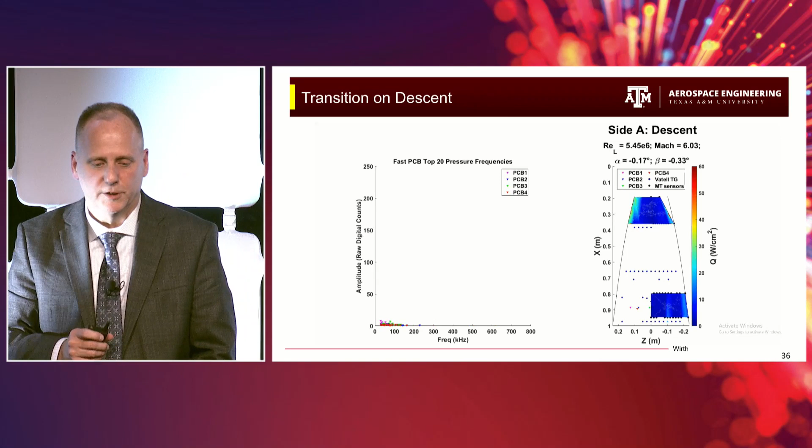So this shows laminar flow. Then you're starting to see some instabilities, and then it's starting to go turbulent on those streaks, and you can see turbulent flow on that bottom wedge. This is real time, by the way. I can't play it again - I don't have that control. Well, maybe I do.

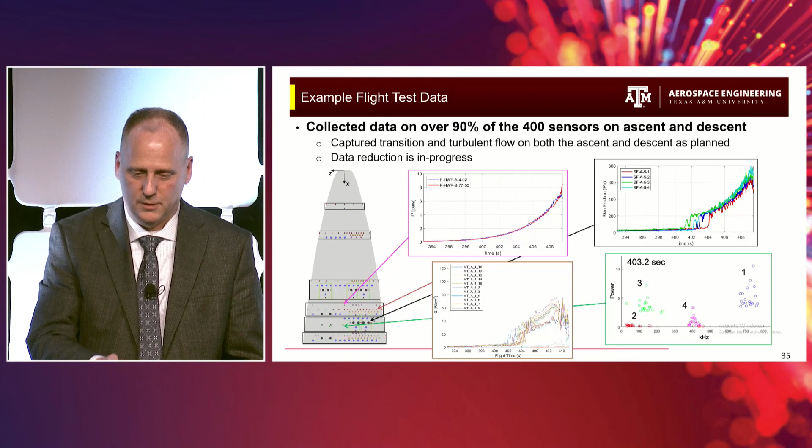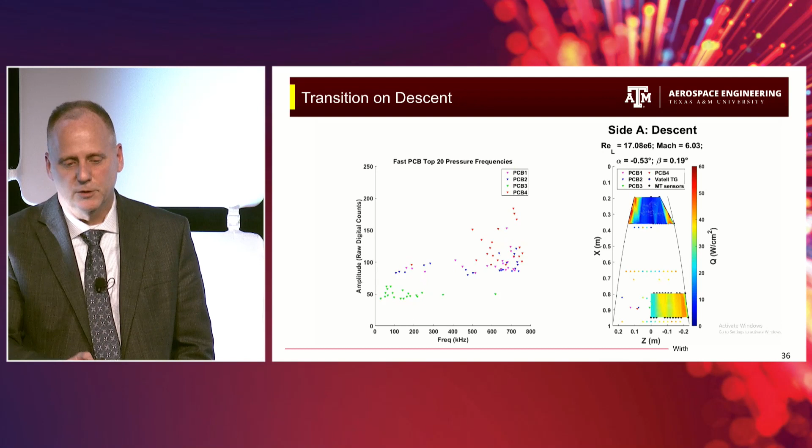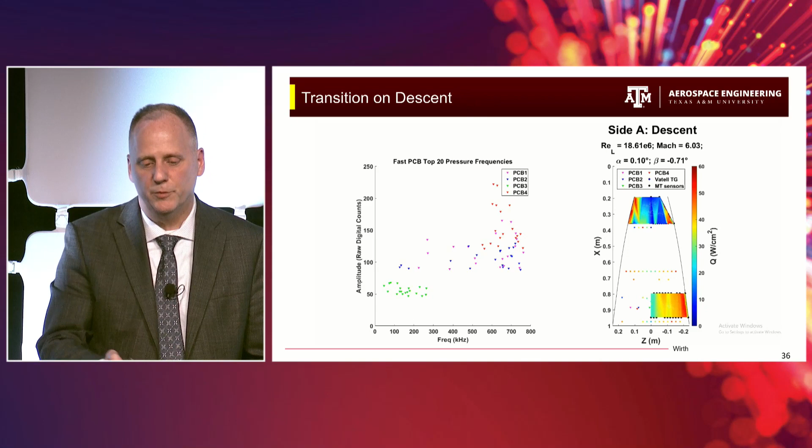I'll play it one more time just to show. I want you to watch the alpha and beta. This thing is coming in true. This is really great - it was a great flight test. This is just a little bit of the data. So every one of those instruments is an experiment. Each row of instruments is an experiment, and then collectively that data is an experiment. So there's just a lot of richness in this database, and we're going to be reducing data for the next couple of years on this.

And then finally, tracking the transition mechanism - I won't go into a lot of detail here because I do want to leave time for a few questions, but you can see the transition on descent, that red line shows which transducer and which row transitioned first. So you can track the transition path, and again, it aligns - it's in great alignment with what we saw in the quiet tunnel. And we did see on the leading edge, transition at much higher Reynolds numbers.

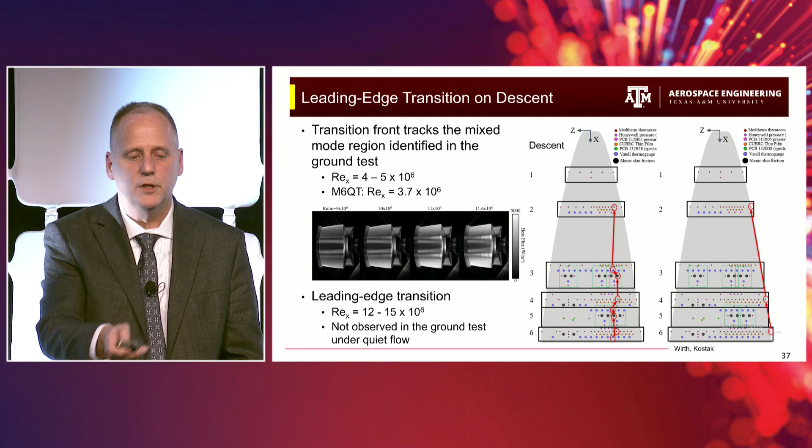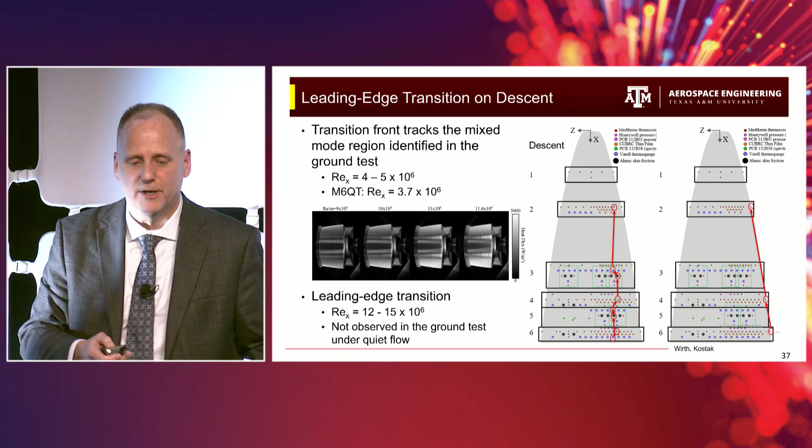I'll also point out that the REX for each of those sensors was roughly between 4 and 5 million per meter in terms of Reynolds number. In the quiet tunnel, we were measuring about 3.7, 4 million on the reduced scale model. And the reduced scale model wasn't exactly the same - it had a longer fetch. It was a 1.35 meter scale model, not the 1 meter model. So some of that difference may be there, but that's excellent agreement.

So this is my last slide. I think this Bolt 2 flight experiment is a terrific example of modeling, simulation, ground test, and flight experiment working together to advance our basic knowledge of hypersonic viscous flows, and in particular transition and turbulence over a concave geometry with swept leading edges. We've provided a new database for flight, plus lots of databases from wind tunnel experiments, as well as numerical databases coming out of the University of Minnesota and others. We're inspiring, I think, new modeling and simulation and ground test internationally - there's a group in Australia doing experiments on these exact geometries. And we're informing the next flight, which is the Bolt 1B.

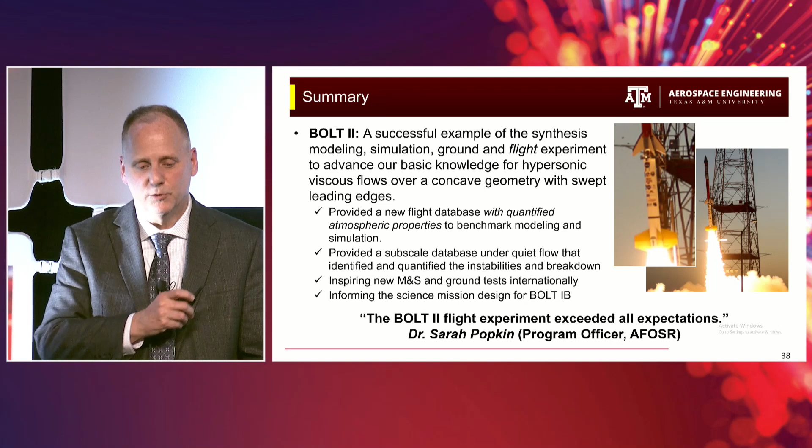And I'm going to end with the quote from Sarah Popkin, which I've heard at least twice now, maybe three times, that this Bolt 2 flight test experiment exceeded all expectations. And so that's it. Thank you.

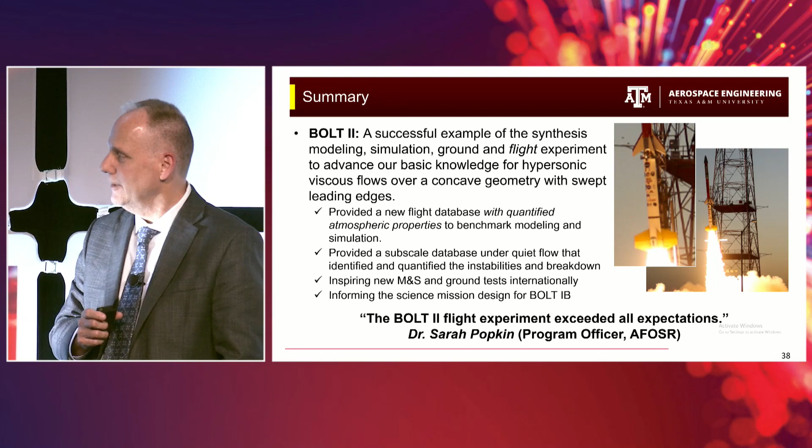Thanks, Ron. Good job.